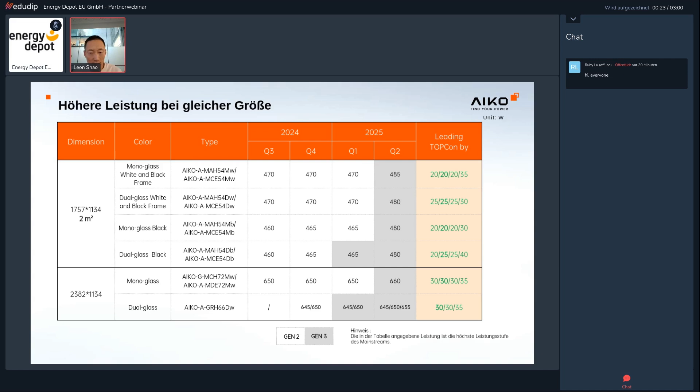Then let us move to the second selling point, higher revenue. For the higher revenue, we have 3 smaller parts to support that. The first part is partial shading optimization. So it is this video.

Oh, I think here is a video, but I'm not sure it can be played. No, I cannot start a video here. Sorry. Okay. No. Okay. So let me try to explain. Then please turn to the next page.

So both ABC and the TOPCon module integrate 3 diodes in the module. And also this module is made up of 3 substrings. That means all the cells are connected serially, and there are 3 substrings in every module. So if one cell is blocked, the whole substring cannot generate power, and the diode will be activated. In that case, the whole substring will be bypassed.

So this means when one cell is shaded, you lose the whole substring. If 3 cells are shaded, the whole module's power will be lost. That's why the shading optimization is really important. For the ABC module, it allows us to shade 3 cells in every substring. So even if 3 cells are shaded, we still can generate power. But for the TOPCon module, when 1 cell is shaded, the whole substring is lost. That's why the ABC module has a better performance under shading.

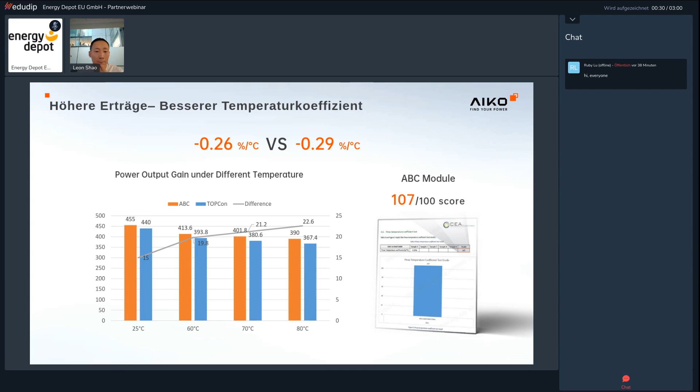Next page, please. So here is lower degradation. At the beginning, I said we use lower penetration, higher resistance N-type wafers. So this is material-based, because our material's UV performance is better. Under the sunshine, the first year, all the N-type, no matter HJT, TOPCon or ABC, we are losing 1%. It's the same, because it's silicon-based materials. But in the following years, we are losing less.

In the following years, every year we are losing only 0.35%, but normally TOPCon is losing 0.44%. So that's the biggest difference. After 30 years, I think the performance gap will be bigger. So we will lead by another 1.5% over TOPCon. So that's degradation. For degradation, this figure is also lower is better.

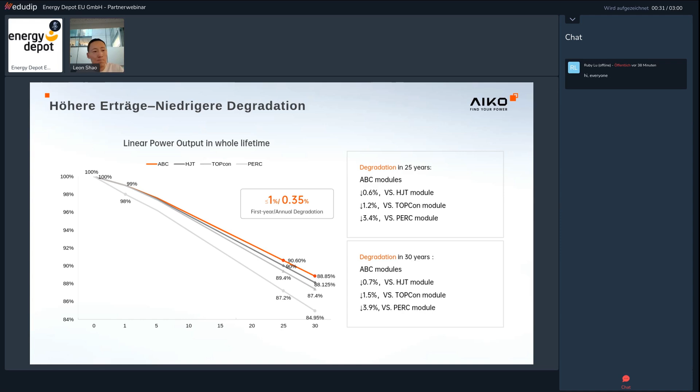Next page, please. Then let us move to the third selling point, ultra safe. So the temperature. Here there was a video before; you can find this video on YouTube. Just search Aiko Energy, and you will see all the videos. Because these materials cannot show the video, we just see the picture. But those kind of videos can be found on YouTube.

Previous page, please. So this temperature control means our ABC module temperature will be controlled to less than 100 centigrade. But for TOPCon, their surface temperature normally can reach 100, almost 150 centigrade. That temperature is not so friendly for the materials. That's why some TOPCon manufacturers had to give up the mono glass modules at the beginning of this year, because they caught fire. So their temperature control is not so good.

Our temperature will not exceed 100. So in that case, our module is definitely safe. That's why we have both mono glass and double glass modules together. So that's the difference in temperature control.

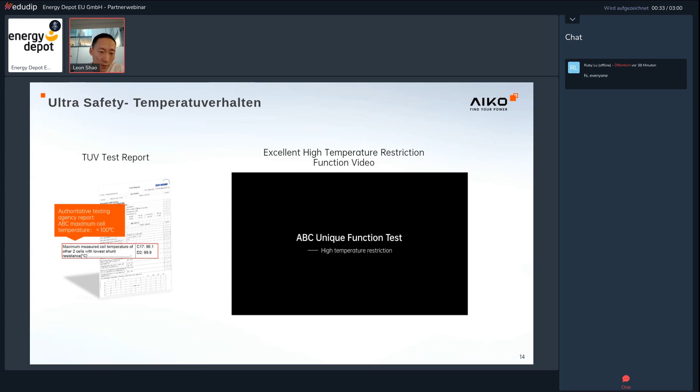Then next page, please. Here you can see on the bottom right side, for ABC, our fingers and bus bars are both welded on the back side, but TOPCon is welded from both sides. So you will see the grid lines on both sides of their wafers, but ABC only on one side. And this kind of welding makes it mechanically stronger. Compared to TOPCon, our strength is 3 times theirs.

You also can find this video on YouTube. For micro crack, just search the micro crack test by Aiko, then you will find that video. In this video, we just destroy 2 cells, and after we test the broken cells, you will see the difference. ABC performance is significantly better than TOPCon. So that's all our second generation product selling points.

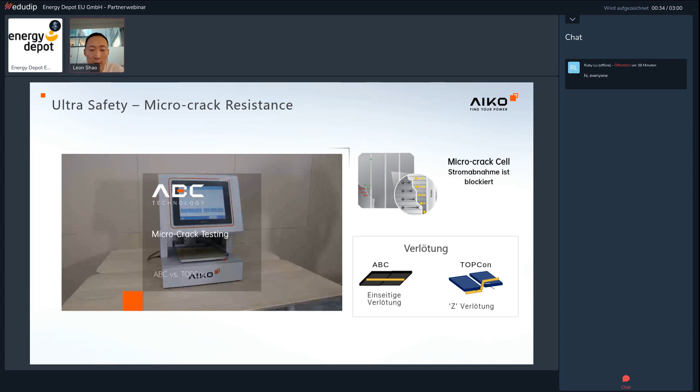Then let us move to the third part. So what new things can we bring for the third generation? Normally, if we want to improve the performance of the module, we have 2 ways. Firstly, we have to improve every cell's performance. Secondly, try to reduce the non-cell area.

So then to improve the cell's performance, our third generation product will adopt zero bus bar technology. The left side is 20 bus bar, the right side is zero bus bar. The bus bar is normally hidden under the ribbon, so it's invisible, but it exists between the wafers and the ribbon. You can see the highlight line with three nodes; that's the ribbon, but under the ribbon is the bus bar. With the new zero bus bar technology, we totally remove the bus bar.

In that case, the distance for the electron to move is quite short, so the performance will improve a lot. For the 2 square meter modules, the power output can improve 5 watts. For the bigger 72-cell module, it can improve 8 watts. That's zero bus bar. And next one.

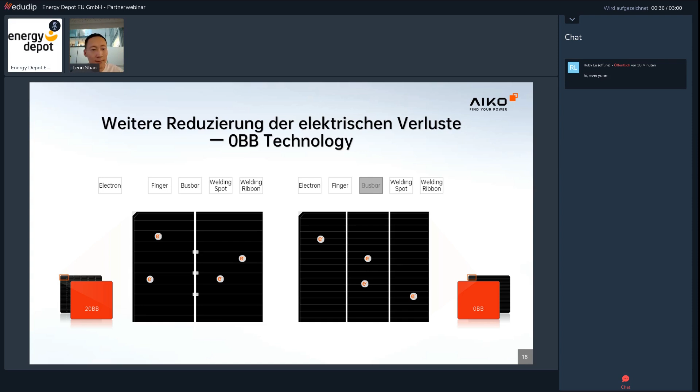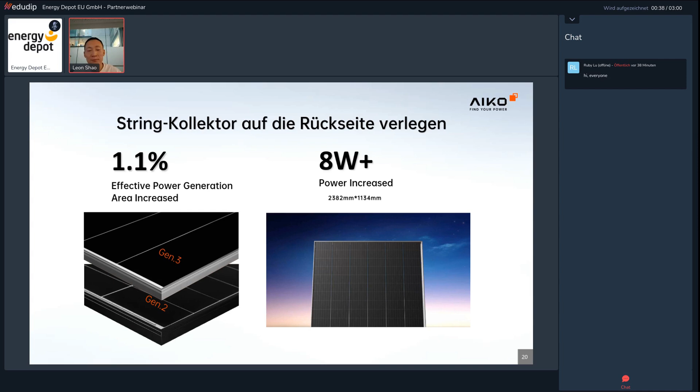Thank you very much for this presentation. Sorry that we couldn't prepare the video. I really hope everyone looks at the YouTube video you did, because it's very impressive. Yeah, sorry for that. The video is just too big, more than 3 megabytes, so it's not easy to transfer. Okay, thank you very much, Leon. Thank you, Roland.

And now let's shift to BIPV products from GoodWe. I will hand over to Jan.

Jan, are you here? Yes, can you hear me? I can hear you. Good. Let me connect my camera. Okay, seems like the video doesn't want to come. I'm sorry, I'm going to start so we don't lose time. Thank you very much for the invitation. If you play the presentation on your side, maybe you can play the video and control it. I guess it's linked to my browser, so I don't want to lose so much time looking for it. Okay, no problem.

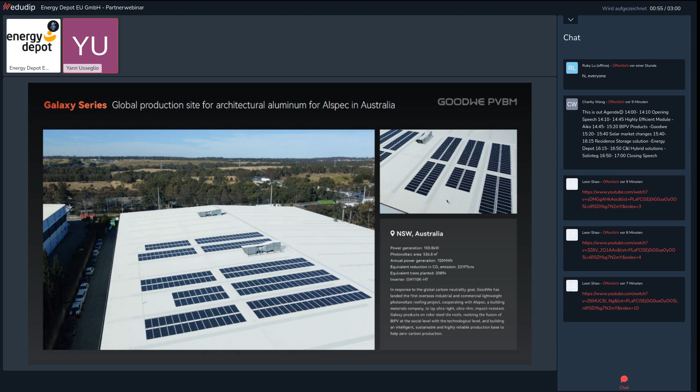So our belief is that, of course, it's not every day and you cannot focus your business only on this kind of module, but we believe it's interesting for a business to know that this solution exists, to have it in the portfolio, because every now and then you have a project and it turns out that you cannot install the standard module you are used to installing every day, and it's a good opportunity not to lose the chance to sell a system to a customer who wants the system. Okay.

So another use case which is very interesting, like I said, is the carport. Carports have been deployed across Europe for a long time. Of course, some countries are more advanced than others. And like I said before, the way we do things in solar is that when there is a use case, we do with what we have, right?

And what we do right now for carports is that you take a standard module, put it on a carport structure, and try to make it waterproof, of course, because you don't want a carport that is leaking. But a standard module is not made to be waterproof. So you use additional rails, you use silicone joints that will be exposed to the sun, and this is not durable, and you might have to change them over time.

Okay. So this is the first problem: the standard modules and the carport systems that go together are not specifically designed, especially the modules, for the use case, which is I want a carport and I want this carport not to leak water on the people or the cars underneath.

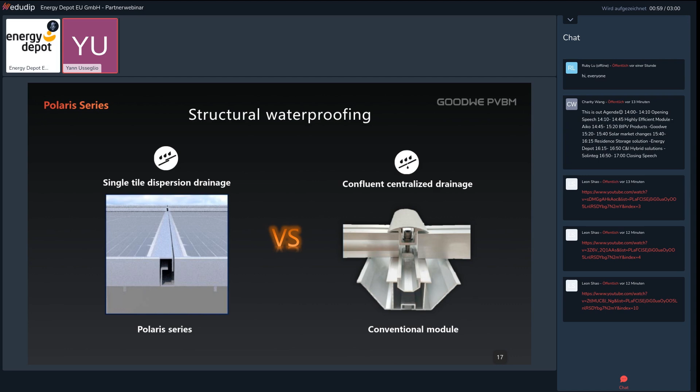And you have much less material, because on the left you see that it's just the frame, so you have nothing else to do, and on the right you see that you need to install a gutter, an add-on system, which may or may not function well. Okay.

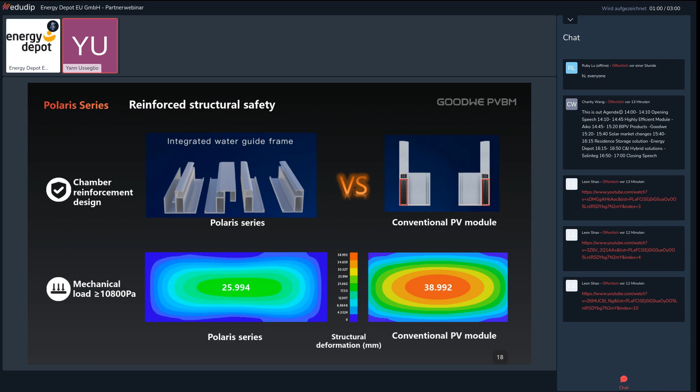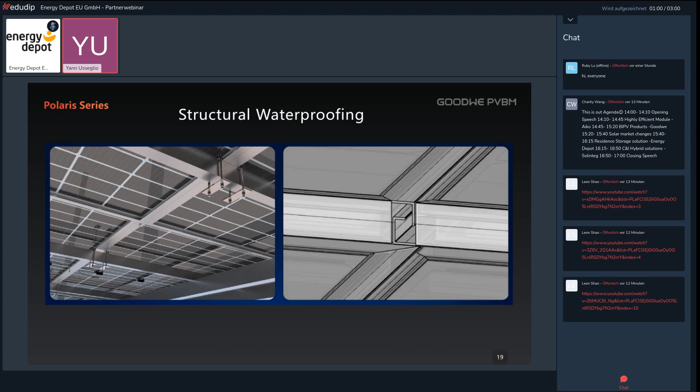And what is good is the way of installing, which means that you don't need to go on top of the carport structure to install your module. You can install it from the bottom, which is also easier. So all in all, you have a product with less material, less parts to install, easier in terms of installation method. So it's also easier and faster to install compared to a standard solution.

Okay, this is what we say. What is nice with Goodwe, like I presented in the beginning, is that we have a global smart energy approach, which means that today we are able for a carport system not only to provide this nice module specifically designed for carports, but also the whole ecosystem. If you need an inverter, if you need an energy storage system, we have it, and if you have the energy storage, we also have the hybrid inverter. This is actually where we come from first.

We have the EV charger, so it's super nice to have everything from one hand, which works seamlessly, with a company that is, let's say, across the corner. We have 200 employees across Europe. We have services, people in the field, so we can support anytime, anyway, which is very nice, especially when we have this form of integration with carport.

So this is the approach, and this carport you can use for a lot of applications, especially for C&I applications, the way you want. We just need to have a carport structure which enables our module to be installed. You can see there, for example, again in China, we have a lot of it. Not only for carport, we also have applications where companies put it on their roof because they have a roof whose membrane or waterproofness is not so good, and instead of changing everything, they put solar on it. It's waterproof, and they get the benefit from it.

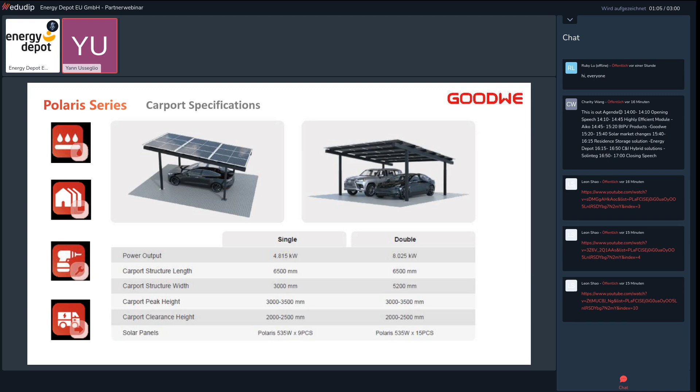And yeah, we just introduced it and started to present it across Europe, and it's really, really nice feedback. And we'll probably extend the range with a full black approach, to have something in the end super sleek. You have integration possible with automated light, with camera surveillance, and of course, like I said, we can make it a whole bundle with the PV or other Goodwe products.

So for those doing residential, again, it's a product that is very competitive in terms of pricing, super easy in terms of logistics for the distributor because we deliver in one box, for the installer because he just has to take one box from his distributor. Everything is inside and it's super fast to install. It's super versatile because depending on the car you have, you can adjust the height, you can adjust the slope, because of the style, because of the snow, because of the ground that is not completely flat. So super versatile, super smart.

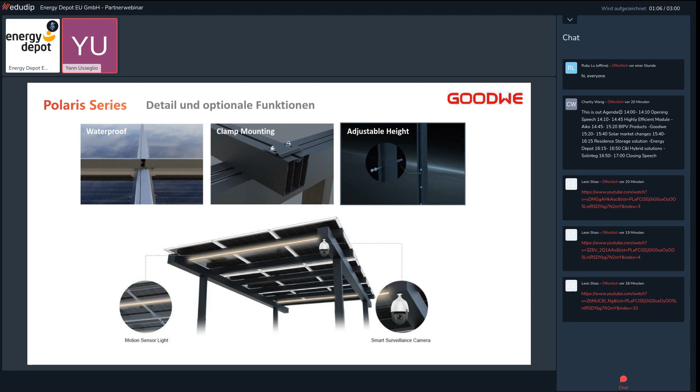So again, probably a nice addition to a portfolio. Not something you install every day, but this is how the solar market is evolving, with more and more use cases. So you need to be ready for that, and to have a solution for something that before you were not necessarily expecting. And yeah, that's it. So we'll finish on this type of product. Thank you. Again, we have a very large portfolio that keeps extending.

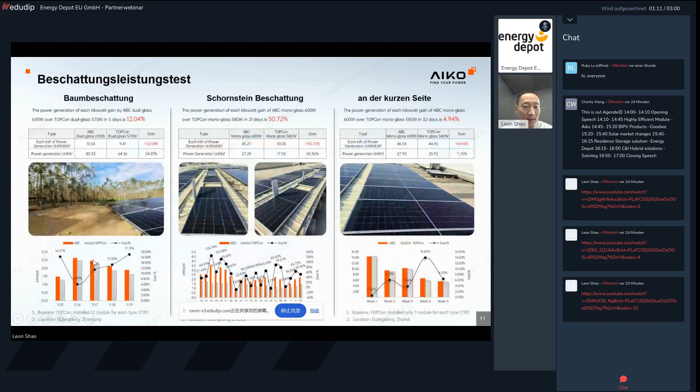So even when those cells are shaded, the other cells connected in series can still generate power. So that's the biggest difference. I'm not sure if the video plays smoothly on your side. So yeah, let's quickly review this video.

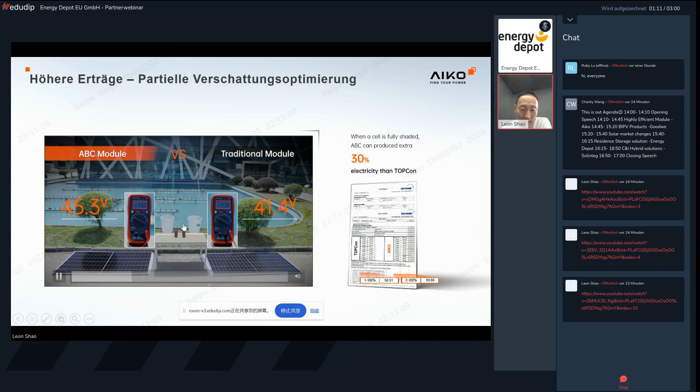So the module is connected to the DC water pump directly. You can check the water is pumped up, and after that, our colleague will shade some cells. Then you will see the change on the water side, and also the metering. So the first cell was shaded, so 1/3 of the energy from TOPCon was lost. You can see the water change. Second cell was shaded, so the water dropped another 1/3.

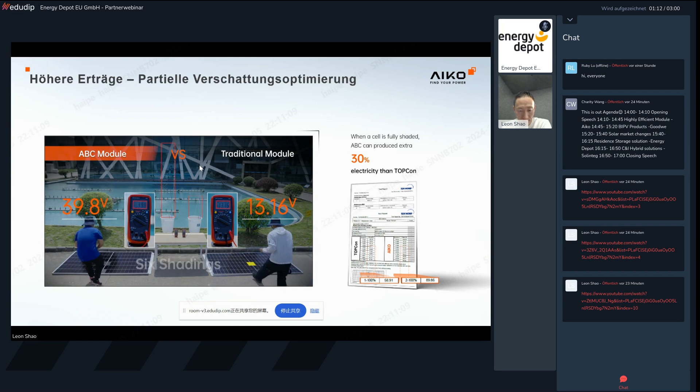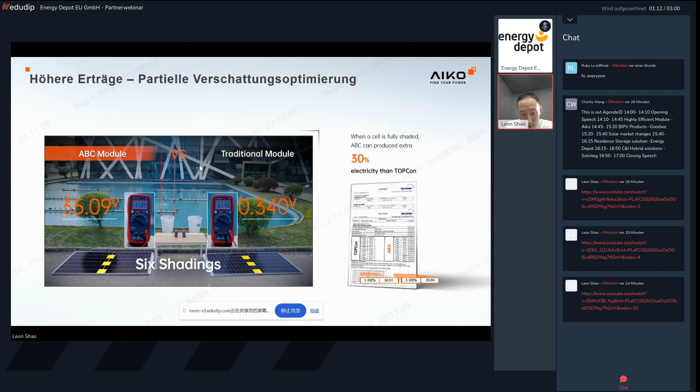Now, the third one was shaded. So from the TOPCon side, it's almost nothing, so it loses 99% of the energy. But the Aiko side still keeps more than 60% of the energy.

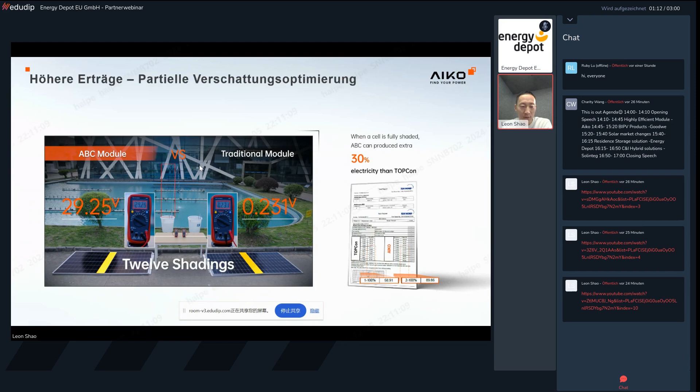So now our colleague is shading more cells. So normally it's 12 cells shaded for the whole module. So you can see we still keep the power generating. So that's the video for the partial shading side.

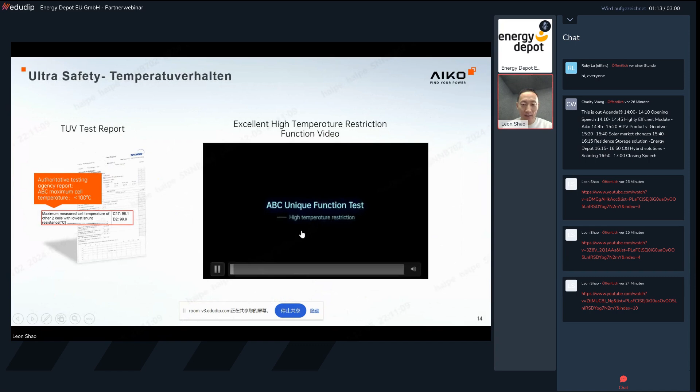So that's the temperature control. It's for safety reasons. I think those kinds of things are really important. So no matter whether the module was installed on the roof or on the ground, safety definitely is the key thing for our customers.

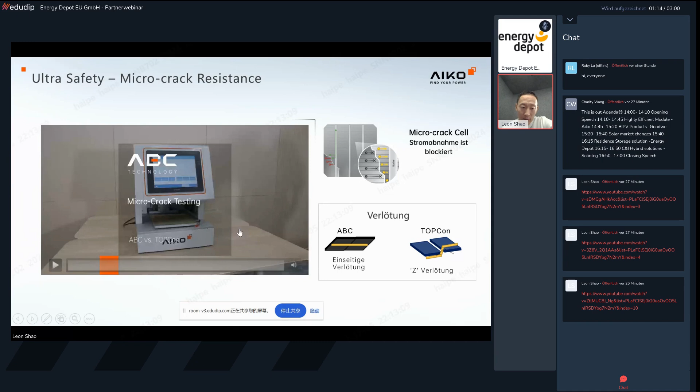Yeah. Now let's move to the fourth video. It is for the micro crack. So normally the micro crack happens very frequently, but it's not so visible. So we cannot check by eye. It can only be checked by microscope. So now let us see this video.

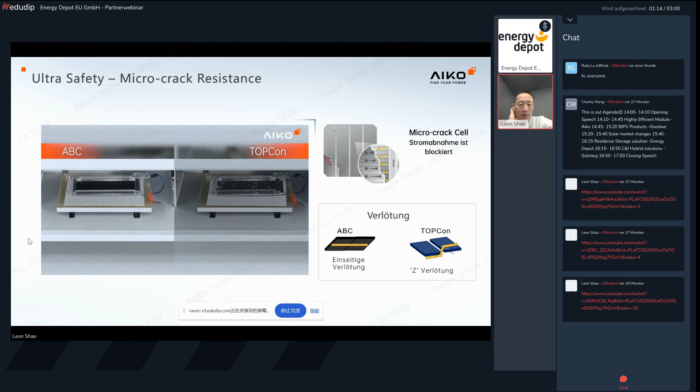Now both cells were broken. So on the left side, ABC, you can see the break is not so heavy, and the energy loss is less. Yeah, we are only losing 17%, but the TOPCon side is losing 45%. So this just gives you a showcase of how strong our solar cells are.

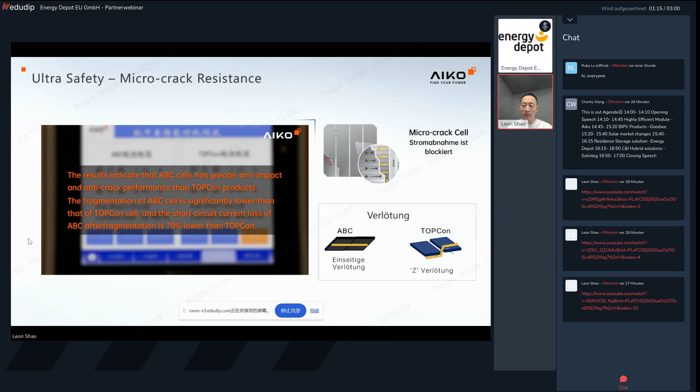So when the stronger solar cells are integrated in the module, even in China, some of our customers are working on the surface, and meanwhile we try to check the micro cracks with the microscope. So it's quite stable. So that's enough proof of how good our module quality is.

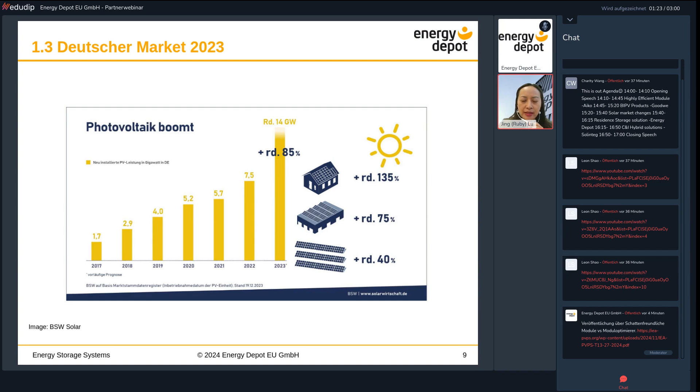But I would say this number only existed last year. It will never happen like that again. And this year we can already feel and see that lots of things are happening and changing on the market.

And I think everybody should know that the market increased that much in the whole of Europe mainly because the electricity price was getting very high. So residential customers had the demand to cover their high electricity cost. Therefore, people were crazy installing or demanding residential products like home Speicher products.

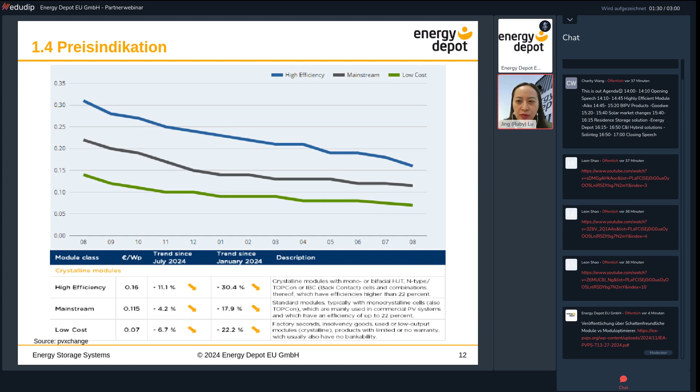So the investment part, I mean the IRR for the projects, is getting much better. So it's helping the utility scale. Also, the C&I projects start moving on. But in the residential part, since the supply is a little bit too much on the market, and the market is also not showing much interest, this part of the installation is not increasing that much. Yeah, so this is what we have seen from the market. That's the trend.

The next part I would like to share is about the technology trend. Let's go back to the module part. As everybody knows, the cell technology is the key part of the module. At the moment, there are different kinds of cell technology on the market. For example, Aiko is using the ABC technology, which has much higher potential efficiency for the modules. But let's just review the different kinds of technology.

In the past, even 2 years ago, the PERC type cell was the main technology on the market. Then from 2023 Q1, the TOPCon cell was published, and it spread very fast on the market, dominating the market in just 1 or 2 years. At the moment, TOPCon modules still dominate the market. At the same time, heterojunction and also BC technology are existing and active on the market. Both of these technologies have existed longer on the market, and BC, because of the back contact, and also heterojunction, in principle have more potential for efficiency.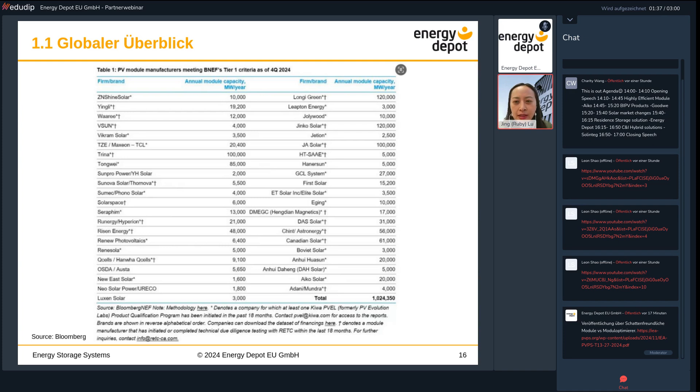That's why the price of modules is decreasing a lot, and there is still a lot of oversupply on the market. But we see this is already close to the end; it's almost at the bottom. Recently, lots of companies in China have started closing their factories, and I'm sure they will close for a while during the Spring Festival. Normally during Spring Festival there will be a shortage of products, so the price might slightly increase again, but only for seasonal reasons. From the whole trend, I would say the price won't go back to very high. Yeah.

Okay, just now we talked about cell technology, and for the module part there are also different kinds of technology to make the module special. For example, a very popular topic now is zero BB technology. It helps the module increase efficiency and also look much nicer.

When we use the modules, there are also different kinds of choices. For example, in different applications people might use different frames; it can be aluminium or steel. In the residential part, people prefer full black modules rather than white ones. And with TOPCon modules, the trend is mainly toward glass-glass. But with BC still, I would say glass-foil, so mono glass is also still very popular.

And as Goodwe just mentioned, lots of new applications are coming. Therefore, BIPV products are also getting very popular, and we see lots of demand. So how we can use lightweight modules, or integrated modules like roof-integrated modules. People are also using modules as a fence or a carport. There are different applications, and the weight and flexibility of the module are very important.

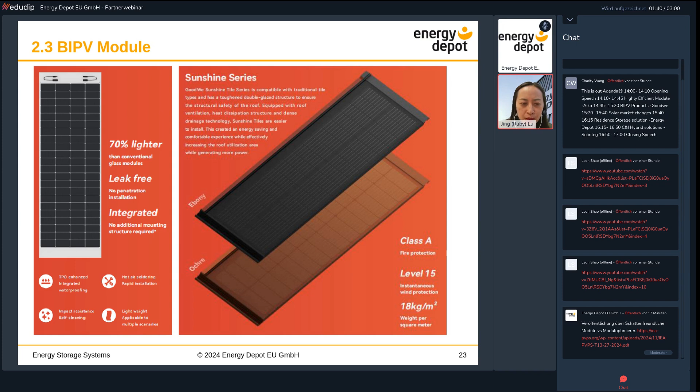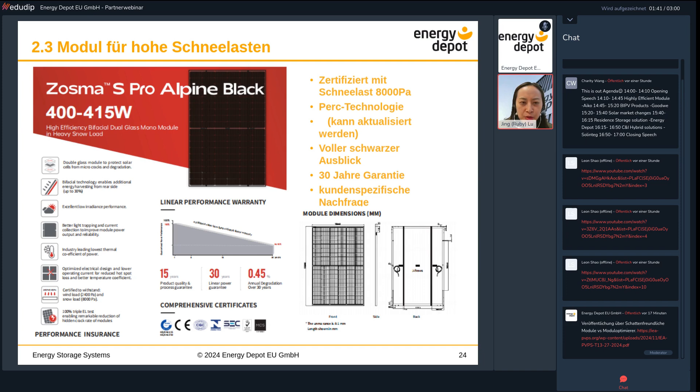And this is a supplier which can offer modules up to 8,000 Pa snow load. This is also very special. And naturally the balcony solution. As you can see, the German market started with the balcony solution, which is very popular, and now more and more other markets are following with those solutions.

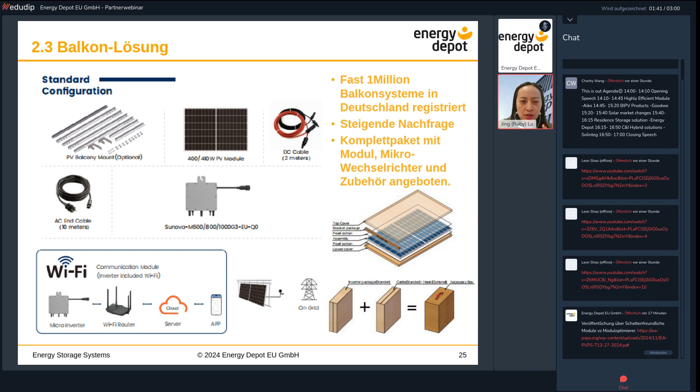But for this part, I would say logistics cost is very important, because in the cost structure the module part and microinverter part are already very competitive. So if we can supply a whole package at a reasonable price, that's very important. But these products also don't go via the traditional channels; they go, for example, more online. The channels are a little bit different from the standard ones and from the utility ones.

At the last, I would also mention the inverter and the battery part. As you can see, it's actually very similar to the PV part. For storage, there's a small system related to residential, and there's also a bigger system. For example, we have installed some for Swiss and German customers, roughly 100 kilowatt hours. This is a C&I solution, and there are also bigger ones, but the bigger systems are mainly closer to the grid. And there are also different products on the market.

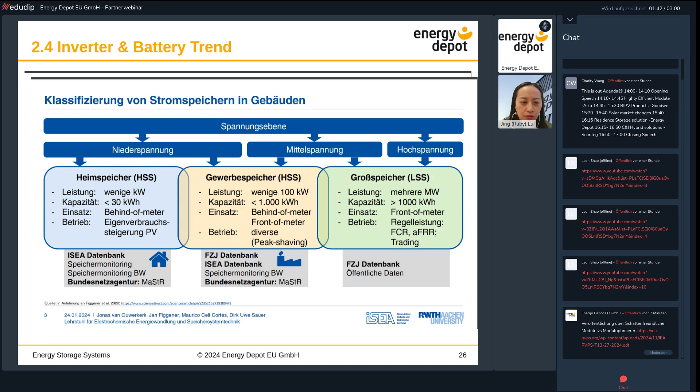But then it's very important: in the whole system, the inverter part will play a very important role. How they can connect the standard PV system, also the battery, and how they can combine with the heat pump and the charging station, and in the future maybe also bi-directional charging. Therefore the inverter part really plays, I would say, a very important role in the whole system.

And also for the battery part, I would say the safety issue is key. We see lots of things happening here, so I would say put security and safety first for the battery. And the whole system should also work very intelligently, and in future it can also have a more active connection with the grid and participate in digital interaction. So this is mainly the technical trend on the market.

Therefore, to summarize, you can see the market is changing. We also see the residential market is, at the moment, in the first step, full. But in the future there's still lots of development potential for the inverter part, because they need to be more smart. So I'm sure new generations are coming.